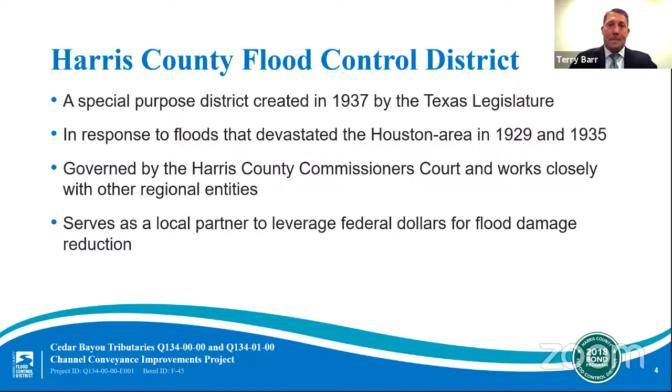The mission of the Harris County Flood Control District is to provide flood damage reduction projects that work with the appropriate regard for community and natural values. One of the most difficult challenges we face is constructing effective projects that are sensitive to community and natural values in a highly urbanized area.

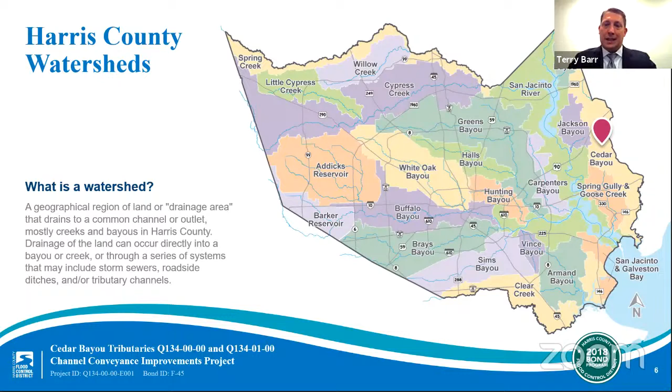Harris County includes 22 main watersheds, totaling approximately 1,800 square miles and more than 2,500 linear miles of channel. 2,500 miles is approximately the distance from New York to California. A watershed is a geographical region of land that drains to a common channel or outlet. Each watershed has its own unique characteristics and needs. The project we're presenting tonight is in the Cedar Bayou watershed, which is located in East Harris County.

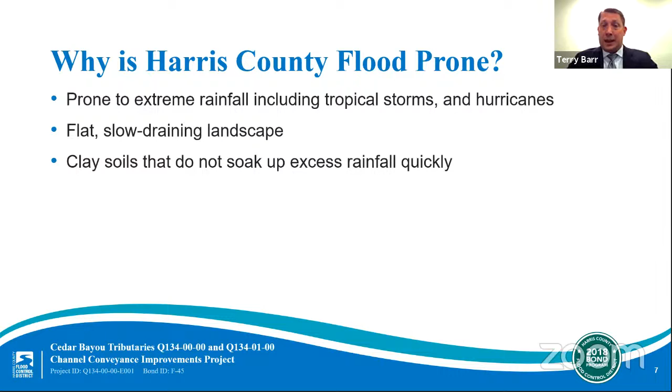So, why is Harris County flood prone? Well, some of the reasons are that the county is prone to extreme rainfall, including tropical storms and hurricanes. We have flat, slow draining landscape, and we have clay soils that do not soak up excess rainfall quickly.

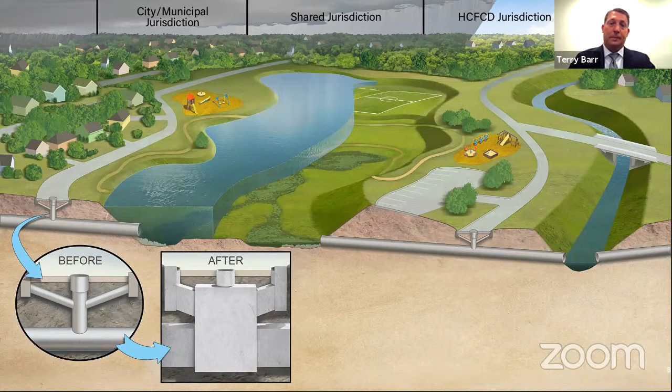On August 25th, 2018, Harris County voters approved a $2.5 billion bond fund for flood risk reduction projects. This vote followed a series of meetings across Harris County in each watershed, which resulted in a list of what is now 181 bond projects.

As of August 25th, 2021, every project included in the 2018 bond program has been initiated, including 8 of the projects in the Cedar Bayou watershed. A total of more than $1.35 billion in partnership funding has also been secured so far to stretch the 2018 bond program even further. The actual timing of each individual project will depend on a variety of factors, including environmental permitting, right-of-way acquisition, utility relocation, and in some cases, requirements of a particular grant. Project lists and projected schedules are updated regularly on our website.

While the bond was for $2.5 billion, the full cost of every project in the bond tables is almost $5 billion. So we made it clear from the outset that we would need additional funding to fully construct the projects in the bond program. As I mentioned, we've had some success so far, having secured more than $1.35 billion in partner funds.

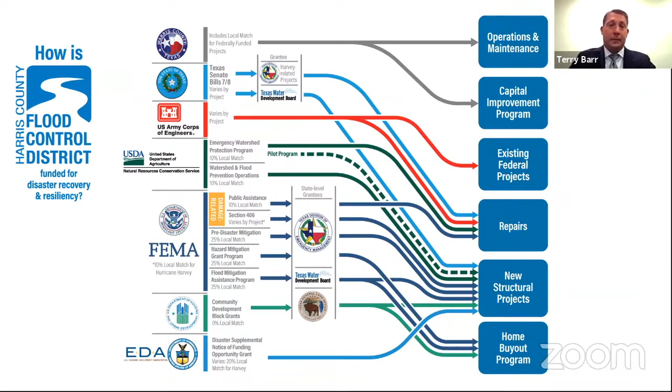With that bond overview in mind, let's move into the part of the program that is specifically about the PER for the Cedar Bayou tributaries Q134 and Q134-01.

Some of you may have attended the first public meeting that was held in April of last year. At that time, we were early in the PER process. We had some initial information, but much of that discussion was focused on the advanced feasibility study that was completed in 2020, which included an evaluation of several flood reduction project options.

Since then, the Flood Control District and the study team have completed various preliminary engineering tasks, including hydrology and hydraulics modeling and analysis, identification of right-of-way needs, topographic surveying, environmental assessments, geotechnical engineering, subsurface utility engineering, and we've coordinated with other agencies to ensure the project's success.

This work has been focused on developing the recommended project that came out of the advanced feasibility study. That detailed evaluation has culminated in this PER, which includes all the relevant information needed to move this project toward design and construction. A draft PER has been submitted to both Harris County Flood Control and the bond implementation team and is now under review.

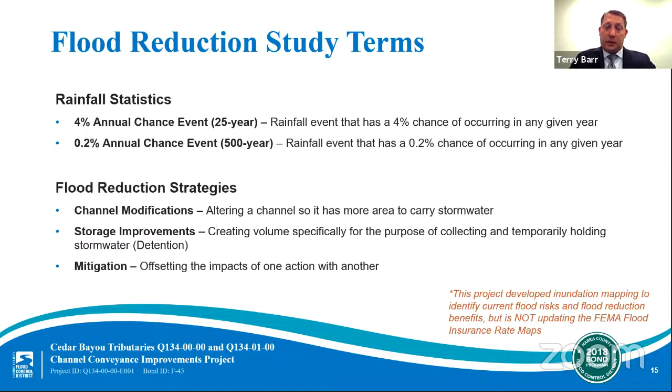Finally, the term mitigation refers to the offsetting of the impacts of one action with another. An example is building stormwater detention to offset downstream flooding that could result from channel modifications upstream. Now, since we just touched on the stormwater detention, I want to give you an idea of how much detention is planned for this area.

A standard football field is just about 1 acre in size. Now think of that football field covered with 1 foot of standing water. That volume of water is 1 acre-foot. Now, as we mentioned just a moment ago, the ultimate solution recommends 1,051 acre-feet of storage to be constructed over several phases. Since 1 acre-foot is equivalent to a little less than 326,000 gallons of water, we expect approximately 342 million gallons of stormwater storage within the ultimate Q134 detention basin. For the current bond-funded project, we're recommending 246 acre-feet, or about 80 million gallons of storage.

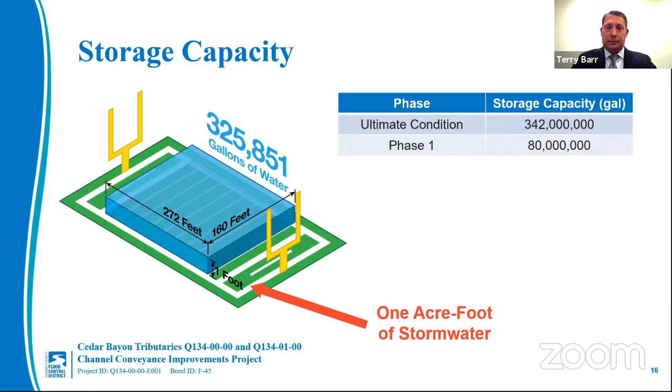Let's talk a little bit about stormwater detention and how it provides flood reduction. There are 2 things that we can do with stormwater to help reduce the flood risk in a given area. We can move stormwater more quickly by channel modifications, or we can store it in a stormwater detention basin. Now, as I mentioned earlier, the 2020 feasibility study identified a stormwater detention basin as one of the primary recommendations for the Q134 subwatershed. A stormwater detention basin stores excess stormwater until it can make its way safely back into the channel.

The Flood Control District typically constructs 2 types of stormwater detention basins: wet bottom basins and dry bottom basins. Both types of basins fill up during heavy rain events and then drain as the receiving channel recedes. The difference is that one has a permanent pool of water and one has a dry, grassy bottom. A wet bottom basin, which is what we're recommending for this project, typically has a permanent pool of water and can provide habitat for a variety of wildlife, as well as other water quality benefits.

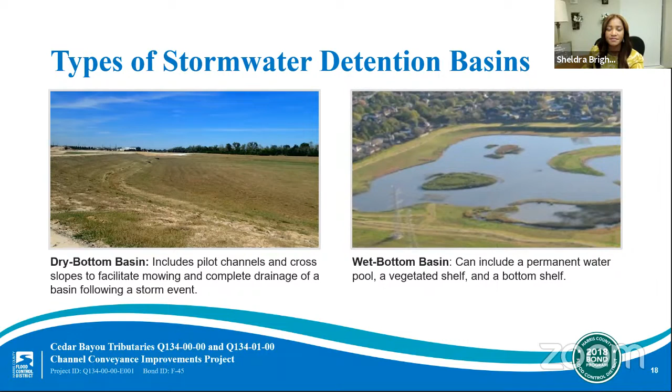Thank you, Dena. Terry, next question is for you. What will this project accomplish? Right, so when the project's complete, the drainage improvements will reduce flooding in the subwatershed, and they're going to help to contain that flow within those channels for your frequent storm events. In addition to that, the drainage improvements are going to help the Forest Manor drainage improvements. So that's Forest Manor and the Lake Houston Woodland Terrace subdivision. We're going to help facilitate that project to help the local drainage improvements within those two neighborhoods.

As far as benefits, there's a lot going on here. Obviously, we're going to be constructing the first phase, which is a 45-acre regional detention basin. That's going to provide about 80 million gallons of storage. So you're going to see some benefits in that. You'll see some reduction in inundated area, some structures that are currently susceptible to flooding now. We're going to be improving that. And then, of course, it will facilitate the longer term project, which is to complete the full 1,050 plus acre-feet and really help provide relief to numerous structures in that area. I think it's something like 37 structures in the area.

But this particular project really sets the stage to move the ultimate solution forward. We have to get this detention basin started in place so that as we start to move to future phases and improve the channels, we can provide the mitigation that we need to ensure that we don't create a negative impact downstream.

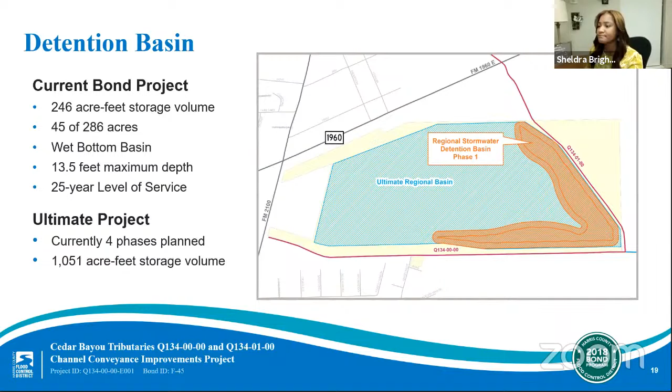So the Flood Control District owns in this watershed about 286 acres. And the property is located roughly between Q134-01 to the east, Q134 to the south, FM 2100 to the west, and 1960 to the north. And that is the site where we're placing the detention basin. So phase one is going to provide about a 25-year level of service with a storage capacity of about 246 acre feet. That's about 246 football fields with 1 foot of water on top of it. That's a pretty substantial amount.

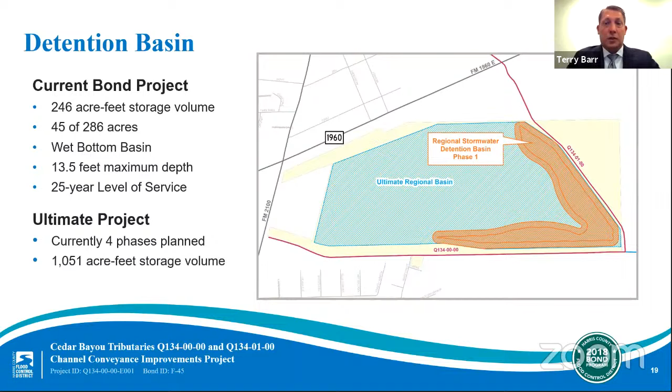The maximum expected depth in the pond is about 13.5 feet. 7 feet of that is the permanent pool. If you heard Dina earlier talk about the different detention basins, this is a wet bottom basin. So that pool is necessary to make sure we maintain the health of the detention basin. So like I said, the current bond project is only the beginning. This 45 acres is only the first part. There's 4 phases here that we're planning for about 1,051 acre feet of storage. So eventually the flood control district property is going to be fully utilized.

Some of the features of this particular wet bottom basin, per the district's criteria manual: we have to have between 3 and 8 feet of permanent pool elevation above the bottom of the basin. This pool is going to allow the sediments within the stormwater to settle to the bottom of the basin and improve the water quality that we put back into the Q134 tributaries. The stormwater detention basin for this project is proposed to maintain a permanent pool elevation of 59 feet, which is about 7 feet above the bottom of the detention basin.

Another feature is a vegetative shelf within the basin. By planting native vegetation around the permanent pool, the vegetative shelf will provide bank stability around the detention basin and assist in the removal of contaminants that get picked up by stormwater.

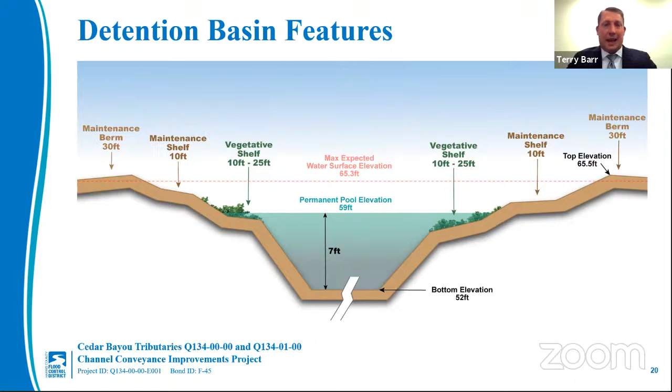In addition, our detention basin will have a 30-foot maintenance berm, which is per the criteria. That maintenance berm is a designated area around the perimeter of the flood control district basin that helps with upkeep, maintenance, and repairs to make sure that the district has access to handle those functions.

So to better understand how this project is going to work, I want to talk briefly about how the basin is going to interact with the contributing tributaries. During heavy rainfall events, stormwater is going to drain south from the Huffman area via Q134-01 and east from the Forest Manor and Lake Houston Woodland Terrace subdivisions, as well as FM 2100, via Q134 from the west. As the water depth in these tributaries gets up, the detention basin is going to start to capture that stormwater through a 20-foot weir structure along Q134 and a 40-foot weir structure along Q134-01.

Now, the weir structure is, in this case, either an earthen or concrete structure, but a weir basically has a defined elevation and dimensions that are going to allow a predetermined amount of flow to enter the basin so that we can store the correct amount. This basin is going to store that stormwater that's been diverted into the basin over a period of time until the flow elevations within the Q134 tributaries are reduced to the desired level.

At that point, the detention basin is going to reintroduce this stormwater into Q134 via a concrete box culvert outfall structure. You've all seen culverts before. It'll be similar to that, where we have culverts that allow stormwater to move back into the channel. By holding that stormwater in the detention basin and letting it out slowly, we can reduce the flows that go into Cedar Bayou and the water surface elevations as well. That'll help to mitigate any negative impacts that we create from the current or future channel modifications.

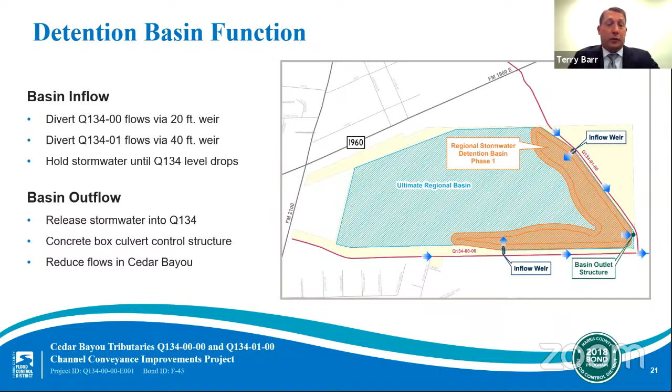We're also doing several complementary efforts. One of those is, as we talked about, the Harris County RRD's project in the Forest Manor and Lake Houston Woodland Terrace subdivisions. RRD's working on drainage improvements in those areas, and we're coordinating with them to help facilitate the detention. Their project is really going to focus on drainage improvements, ditch and storm sewer improvements within the Forest Manor area.

By facilitating the detention, we're providing cost savings. That coordination has also allowed us to postpone the construction of a channel that was originally proposed along the east side of the Forest Manor area. So this coordination has helped save money by moving that project later down the line. As Glenn mentioned, their project's supposed to start in April of 2022 and be completed by October 2022.

We're also working on an excavation and removal contract, which is going to allow a contractor to come in advance of the construction phase and excavate soil from the flood control district owned site. By allowing that contractor to excavate what we're calculating as up to 87,000 cubic yards of soil, we think we can reduce the construction cost by about $1.25 million for the detention basin. The district is working on engaging a contractor for that E&R based on the design right now.

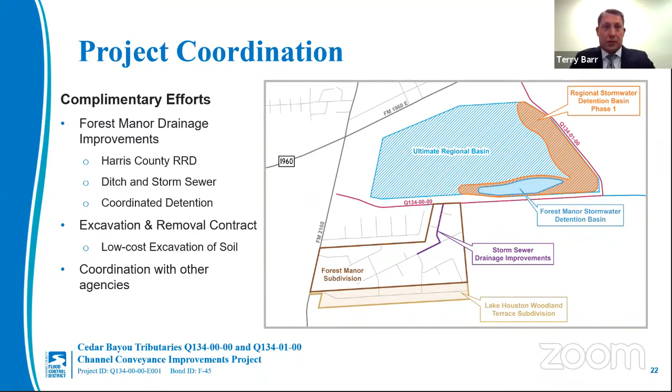And of course, we've been coordinating with Harris County Precinct 2, Harris County Engineering, TxDOT, the Corps of Engineers, and the Texas Historical Commission. That coordination is going to help us ensure that we can move into the design and construction phases as smoothly as possible.

So, from the benefit side, this PER is really just the first phase of our long-term approach to building out the improvements within the Q134 sub-watershed. But as far as immediate benefits, certainly we're going to help reduce the amount of flow that enters Q134 and then ultimately Cedar Bayou after this phase 1 detention basin is complete. We should be able to remove inundation from up to 4 structures and 17 acres for the 0.2% annual chance event. If you'll remember the terminology discussion earlier, that's a 500-year event.

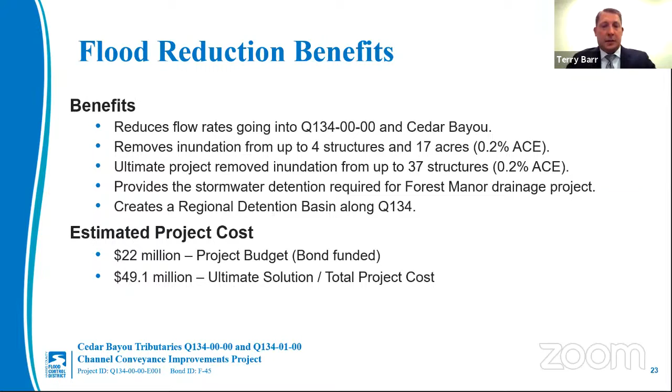Ultimately, as we complete out the detention basin and other improvements, we think the project will remove inundation from up to 37 structures for that 0.2% annual chance event. And again, these numbers don't include all the improvements that we think we'll see in the Forest Manor subdivision. We won't claim credit for their improvements, but we are working together to facilitate that project so that we see flood reduction in the Forest Manor area, and then we're capturing that stormwater and mitigating any increases from their improvements so that we don't see adverse impacts downstream. And as I said, the project is going to cost $22 million and it's funded by the bond.

So next steps, just to kind of go back through, we're going to be listening to your comments and feedback from this meeting, and we'll be incorporating those into the PER as appropriate. We're going to be completing the PER in the next few months, and then it'll go to the Commissioner's Court for their approval. Once that PER is approved, we can move to the final design stage, which we expect to take about a year. After the final design is approved, the project's going to go out for bid, and then construction can begin, which we expect to start in early 2023.

So, as we work towards completing those designs, we're going to be working through the ENR. We're going to be continuing to coordinate and communicating with the Forest Manor Drainage Project, which is set to start within the next 6 months.

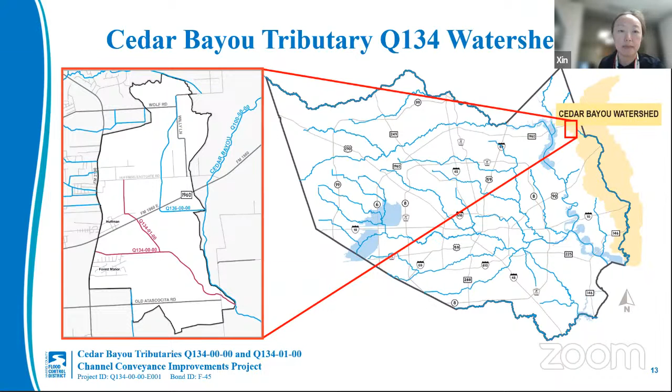Thank you, Xin. Next question will be for Dena: what type of stormwater detention basin is included in this project?

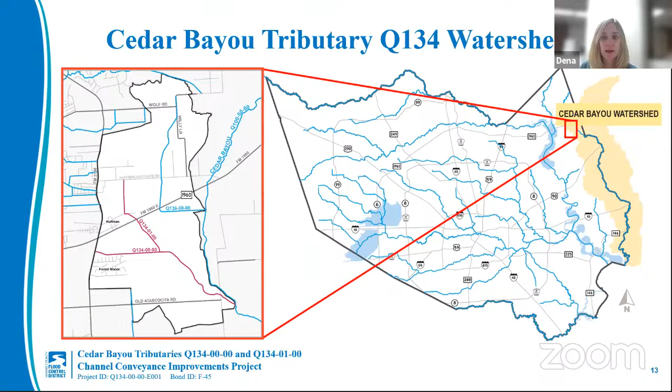This will be a wet bottom detention basin. You can expect to see that permanent pool constructed as part of both our phase 1 detention basin and the long-term, ultimate detention basin that flood control will be building out in future phases.

Thank you, Dena. Terry, what is the status of the stormwater detention basin as it relates to channel improvements? This current phase really is focusing on the detention basin itself. There are several phases to this overall project. It's not just the detention basin that's phased, it's also some of the channel improvements.

As we looked at the ultimate solution, it included channel modifications to Q134, and a new channel that runs north-south along the eastern side of the Forest Manor and Lake Houston Woodland Terrace subdivision. All those components go into the ultimate solution.

However, like I said, the budget for that is $49+ million, and we only have 22. So this first phase is really focusing on the detention basin. That detention basin will facilitate those future channel projects as more money becomes available.

The reason we do the detention basin first is because if we improve the channels and their carrying capacity, we're going to end up allowing more flow to move more quickly downstream. If we don't provide the detention to mitigate that, we're going to end up causing a negative impact downstream, and that's against flood control district's policy.